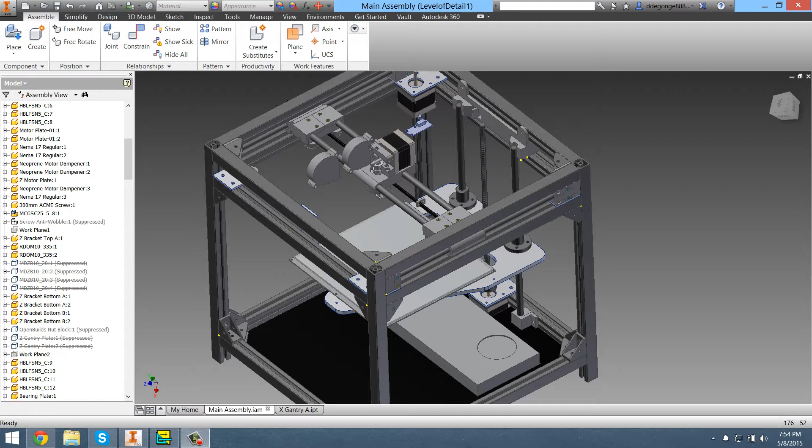Hey, it's 3D Printing Life here with a quick update on the Eclips3D. I'm going to go through a lot in this, and I'll go fairly quickly because I've got stuff to do. Let's start with the small stuff first, because I'm sure you'll see the big change, but I'm not going to talk about it yet.

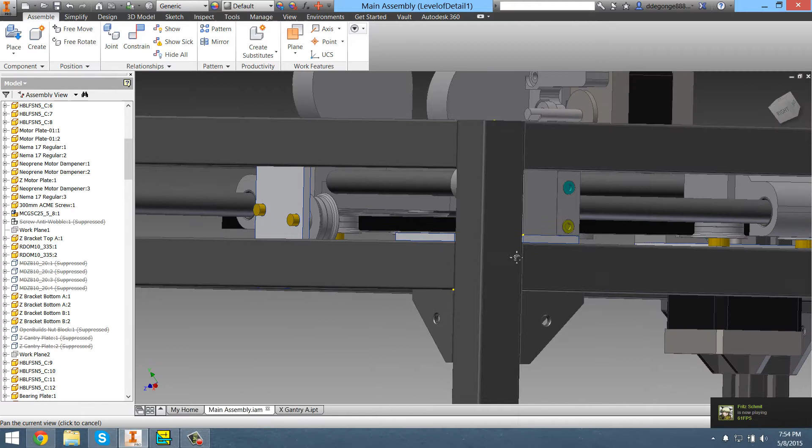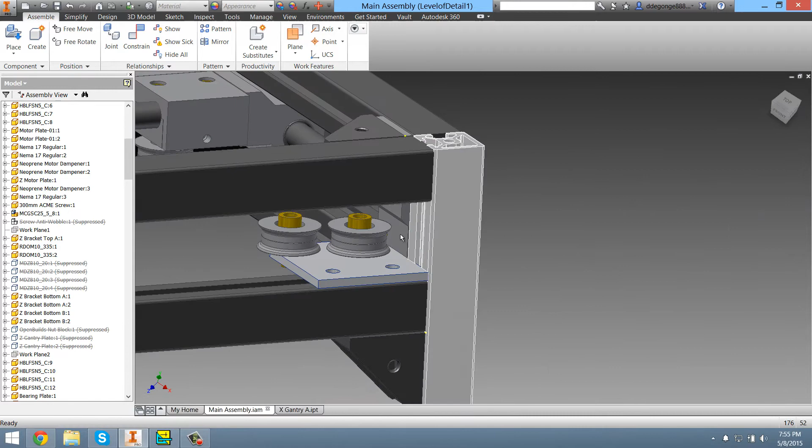I put in bolts - color-coded bolts, so the colors represent the lengths, starting from red being the shortest going up to blue being the longest. This helps me optimize bolt usage and filter out any unneeded bolt lengths. Like here I have an M3x16, but I have a few M3x14s, a few M3x20s, no other M3x16. So I'm going to replace these with shorter ones because they can't go longer due to this pulley. I'll drop that in another 2mm and replace it with an M3x14, and that's done.

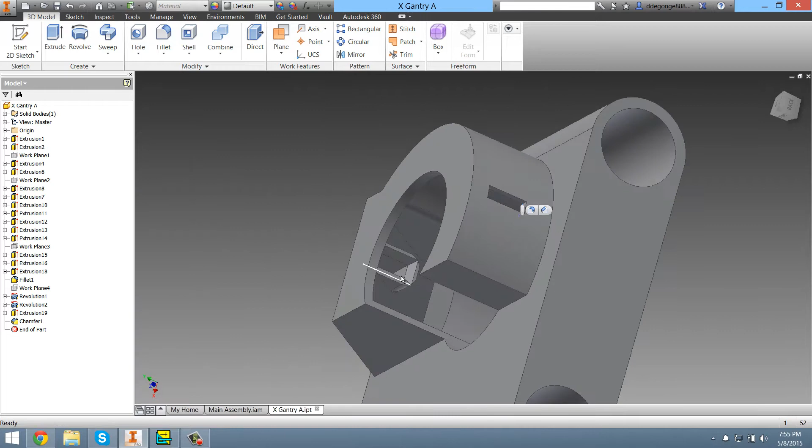So that's going to be good. I worked a bit on the X gantry - I believe not on the extruder, but I did work on this guy a bit. I have it open, and I put in some belt mounts. These were just quick temporary ones, but they may actually stay because they're fairly decent. I'll see how they hold up.

This ducting is now going all the way through, and it does work. I tested it with a fan in real life, as well as the belt mounts.

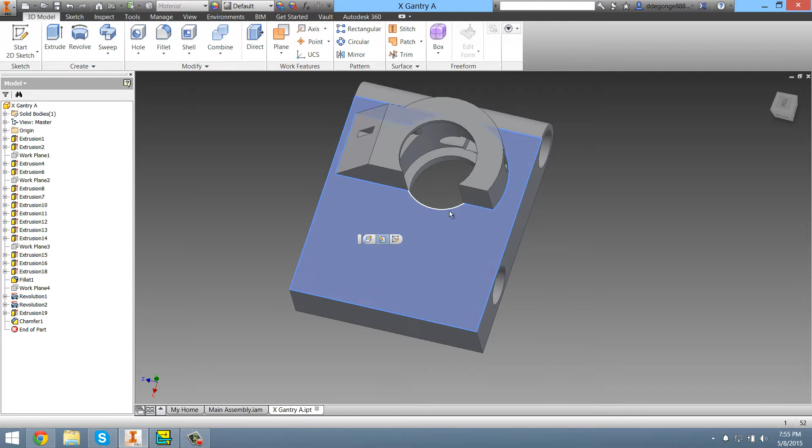And then here I'm going to have to put in the belt tensioning system. Because it's Core XY, there are actually two different segments of belt that are completely separate, and they're both going to join up here, so I'll have to tension them both here. I'm probably just going to have something similar to what I had on the 3-up, and that should be good to go.

Coming back here. Oh, one more thing - a pretty big change.

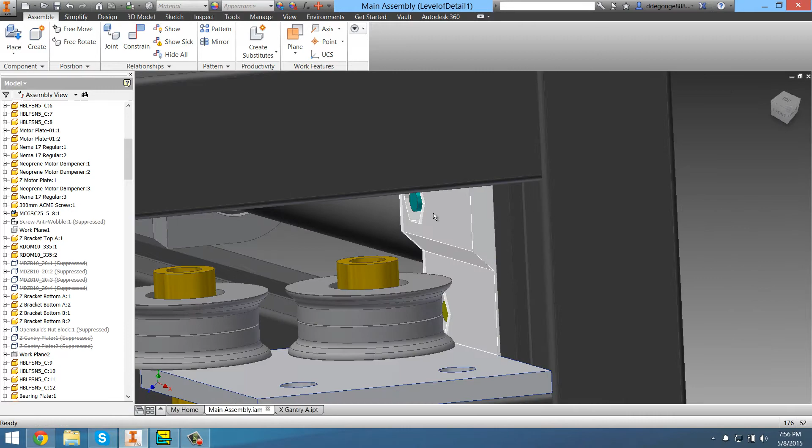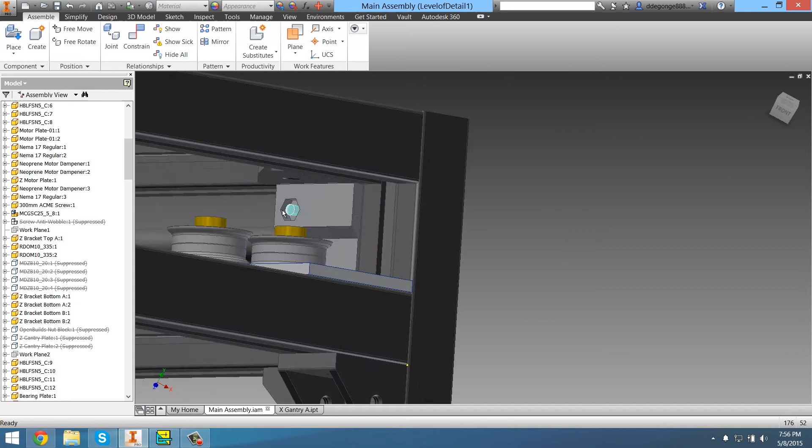For the M3 nuts, I'm doing away with these hex nuts. I actually just bought some square nuts from Misumi, and when bought in bulk those cost quite a bit more, because I was getting the M3 nuts dirt cheap, but these are still like $3 for 100 of the square nuts. What that means is these little slots should be a bit more accurate - they should be easier to push the square nuts into, and the square nuts should stay still, shouldn't spin in their slots like hexagons can, so more torque and stuff like that. So that should be good.

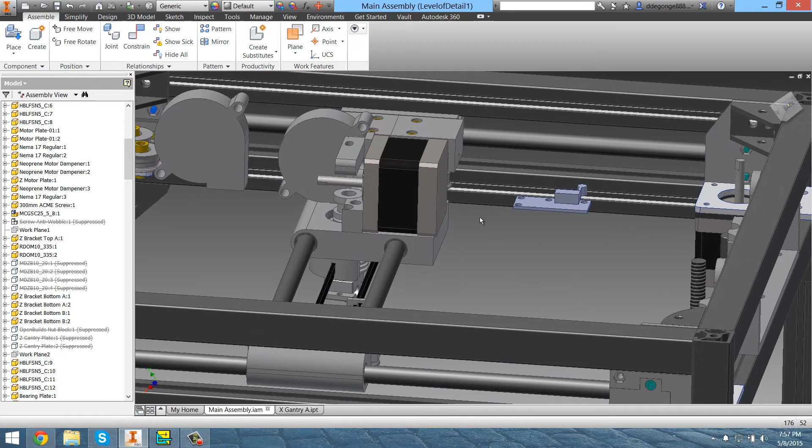I'll be getting those in soon, probably in a week or so, and then I've got to start redesigning all the parts so that they can accept these square nuts instead of the standard hex nuts.

So yeah, let's get on to the big change. This guy - kind of unavoidable. As it is now, these are on the wrong side. They're supposed to be mounted from the underside, but I didn't feel like changing them, so that's how they are now. But what is this?

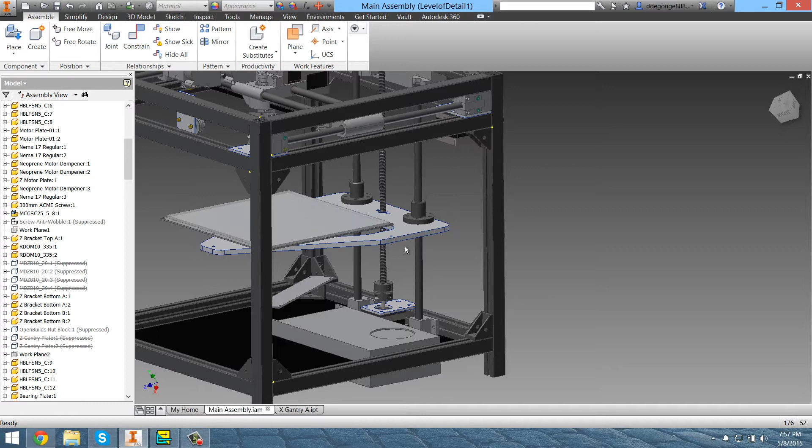This is a complete overhaul. If you remember the old Z-axis, it was a mess. I had two of these bushings on each rail, spaced apart. I had aluminum panels on each side that were fairly big. I had extrusions coming out. I had an aluminum panel on the front. I had two aluminum panels along the bottom to put the bolts through to mount the bed, and then I had a few cross pieces, and a nut block with the cross piece, and I think I was going to put in another cross piece, but I didn't.

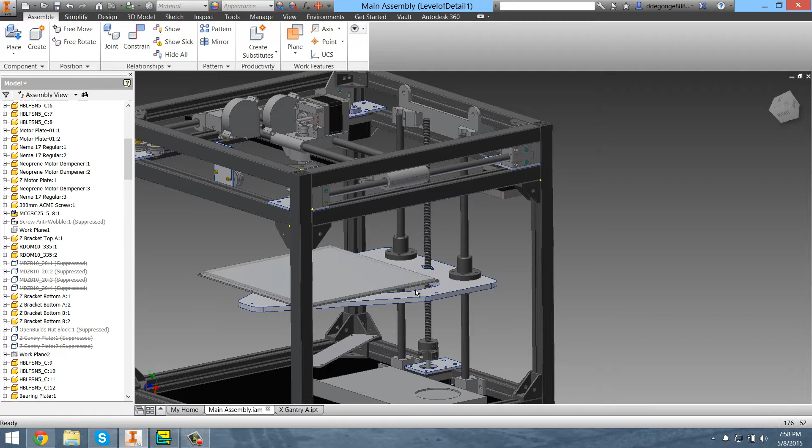Anyway, huge mess, so I simplified it a lot. This actually was inspired a bit by the MakerGear M2, fairly, I would say. It's basically just a quarter-inch aluminum plate that's been cut out in sort of a triangle. The middle has been cut out for weight reduction, and that's it.

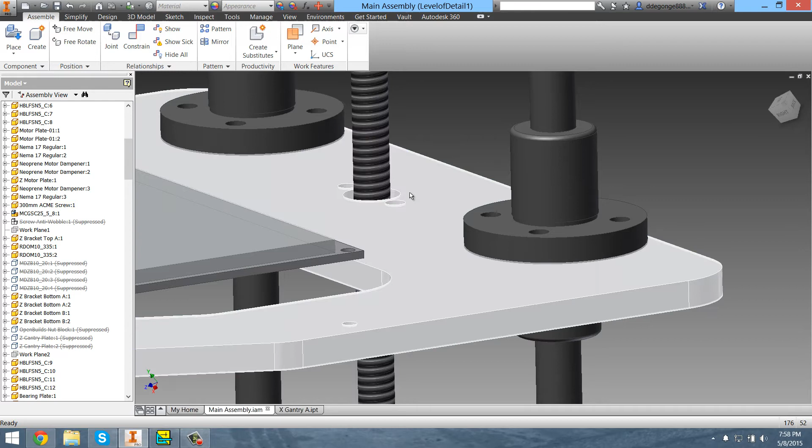It's got bolt holes to mount, tapped holes to mount these bearings. They're linear bearings too, so they should be better with the torque. And then there's going to be a little nut block in there, and yes, they are tapped, so you just put the screw right through these guys and screw right into this piece and you're done. There's no nuts or anything on the Z-axis, which is awesome.

Yeah, so that's the big change right there, and the main reason this is possible is because of eMachineShop. There's probably other machine shops out there, but this one's just so easy to use. It was so easy to optimize my design because you can literally just find the price out right away. Don't get too excited, this isn't the actual price for them because these aren't finished.

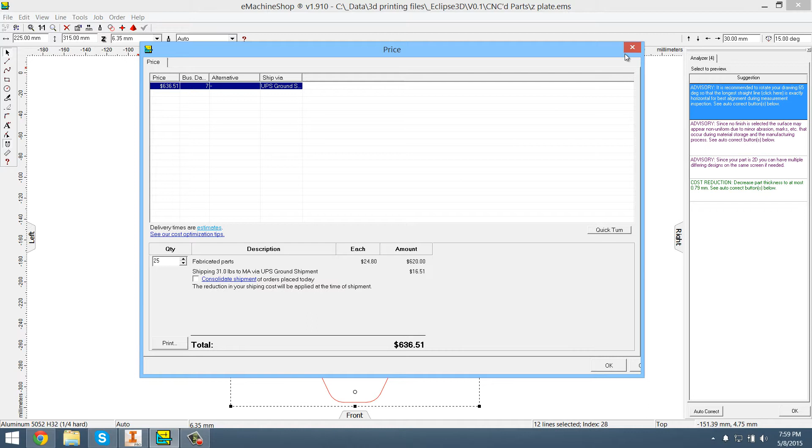But yeah, so I mean, I could just make changes, see how it reflected the price, and then just keep going back and forth until I got a really low price and still had the strength I wanted. If you're concerned about strength, it is a quarter inch, so it's fairly hefty aluminum if you've never handled quarter-inch aluminum before. So it's rigid stuff.

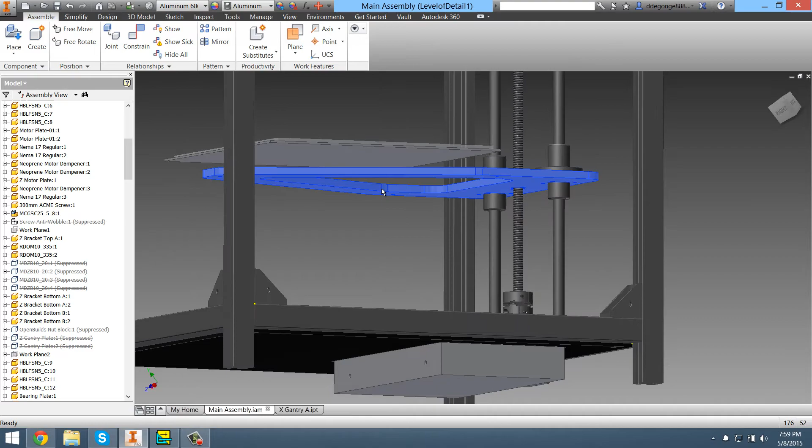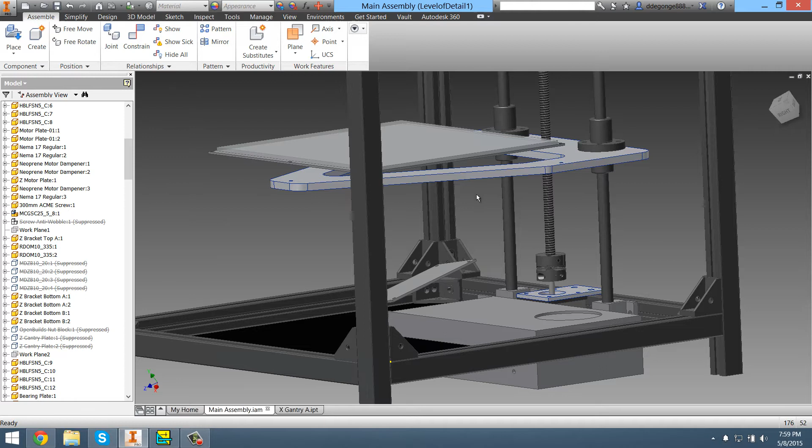These bars going across are 30 millimeters wide, these triangle pieces. And in SolidWorks and in Autodesk stress tests, I found that under the weight of the gantry plus another pound of load, it only deviates by about 0.1 millimeters, which is nothing at all. Under a 2-pound load, it's like 0.2, and then under a 4-pound load, it's 0.3 millimeters.

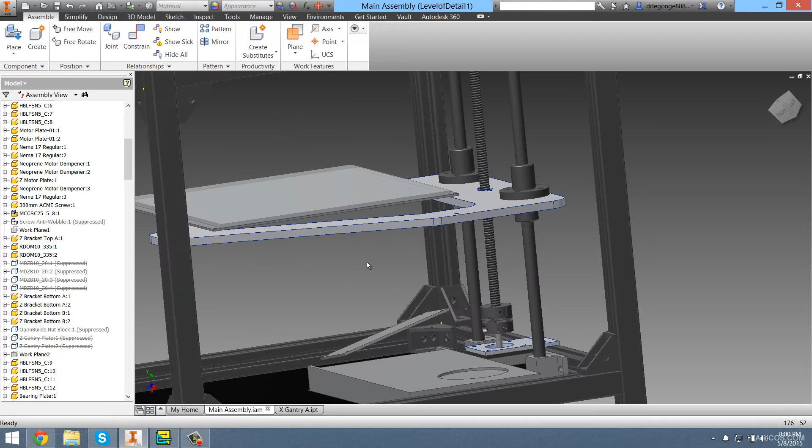So if you ever print bricks out, you'll be fine. No, but that's plenty. It's more rigid than a good portion of printers out there, so it should be fine. And to be honest, it's probably going to be a bit more rigid than my old design, just because the old one had so many bolt joints that each one of those has a little bit of give to it. So this should be good.

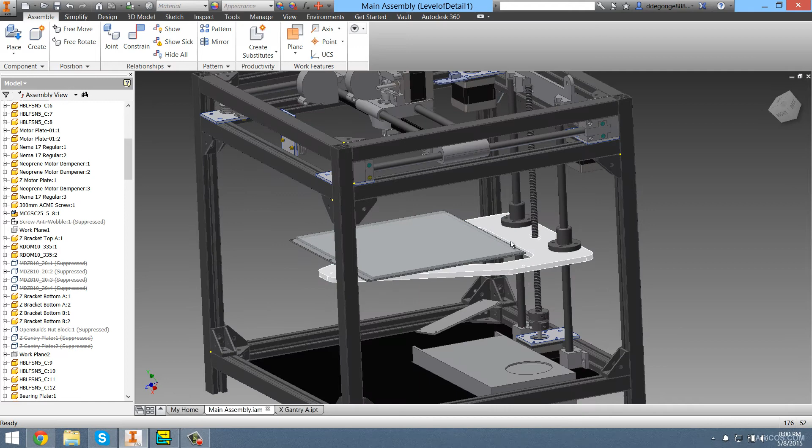I really am not worried about this design at all. In fact, I'm getting ready to order my prototype unit pretty soon, which is going to be quite expensive, but whatever, it is what it is. So yeah, that's the main change right there.

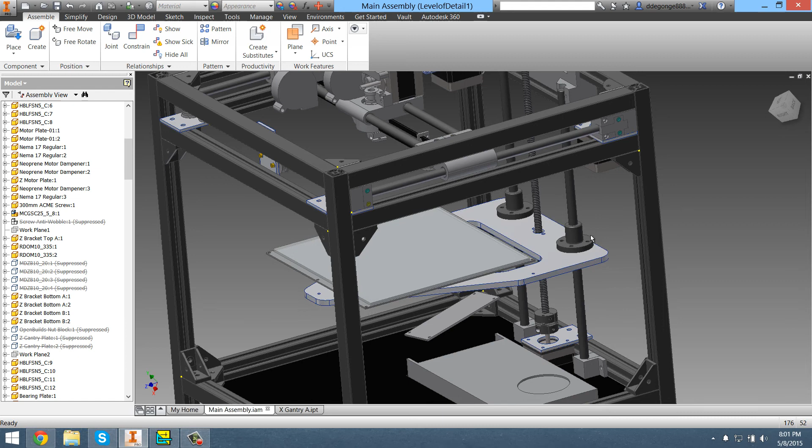Oh, and this is going to be, in case you care, 5052 aluminum. Yeah, I believe that's it. And it's going to be bead blasted, which is just going to give it a matte texture. So nothing too fancy. I might have it as a stretch goal where you can get it anodized, black anodized plates and stuff like that, but that's stuff to be determined later.

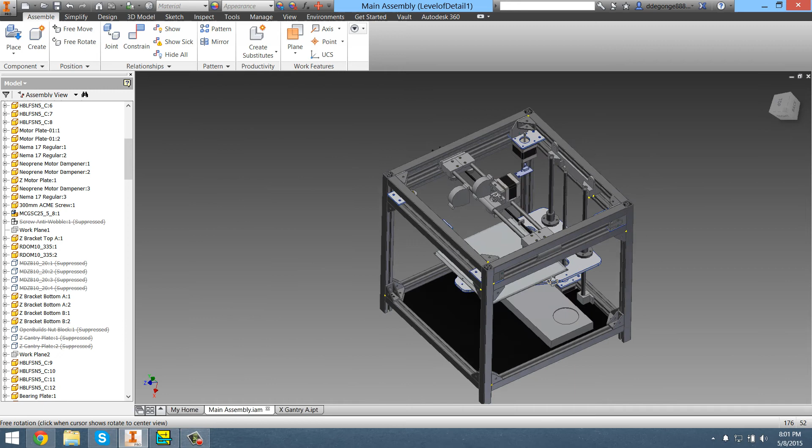So yeah, that's the main change right there. So I hope you guys enjoyed this. Oh, this also should give a bit more Z travel because these are only 50 millimeters tall as opposed to 100. But yeah, so that's pretty much it. That's the main change, I should say, and then some small ones.

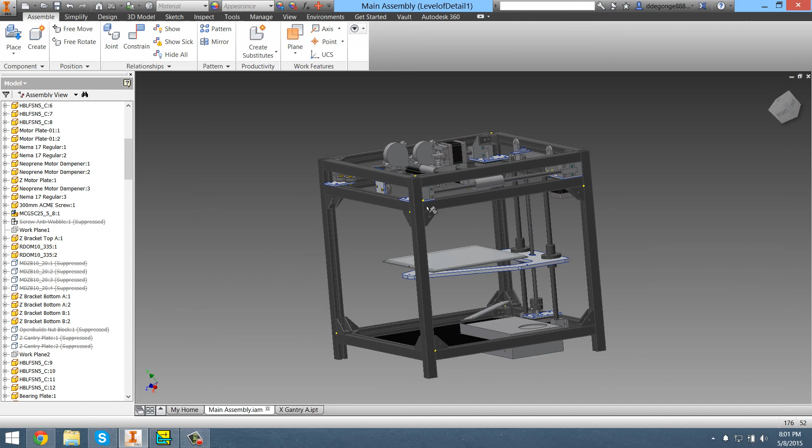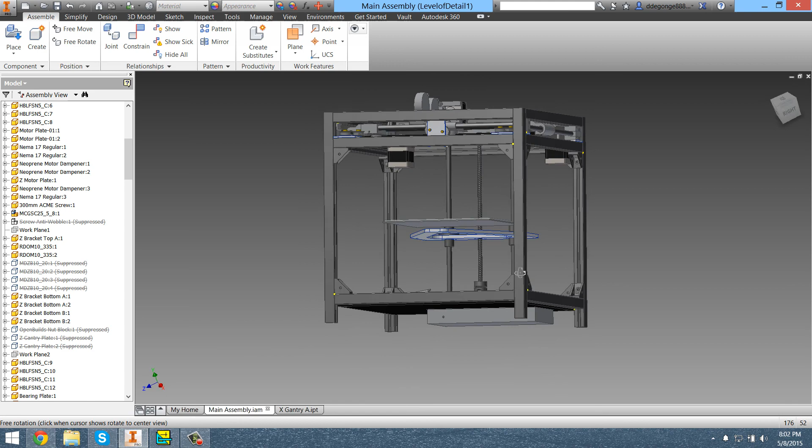I'm still waiting on these panels. They'll probably come in before the bed, but whatever. So pretty cool, pretty exciting, and really can't wait to see how this comes together. At this point, I mean, before I was worried about the Z-axis, but now that I came up with this design and it's really not that expensive, I'm honestly not worried at all about the printer, which is a little bit concerning because it means that something's going to pop up and surprise me.